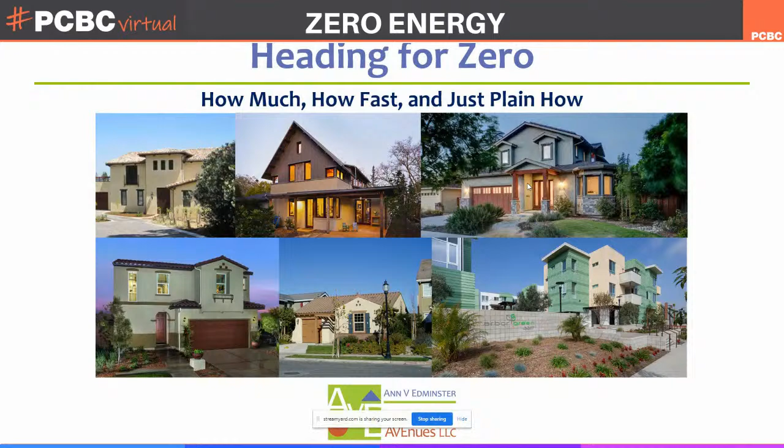Heading for zero: how much, how fast, and just plain how. We'll walk through several topics, but before getting into the core content, I want to review what exactly we're talking about with zero net, and what the heck is the E for anyway.

It's a moving target. Depending on who you're talking to, it might be zero net electricity, zero net energy, or zero net emissions. But to start with, the basic concept applies across the board: whichever we're talking about, the idea is reducing a building's energy demand through efficiency measures to the point where we can meet its annual energy needs with a renewable on-site system.

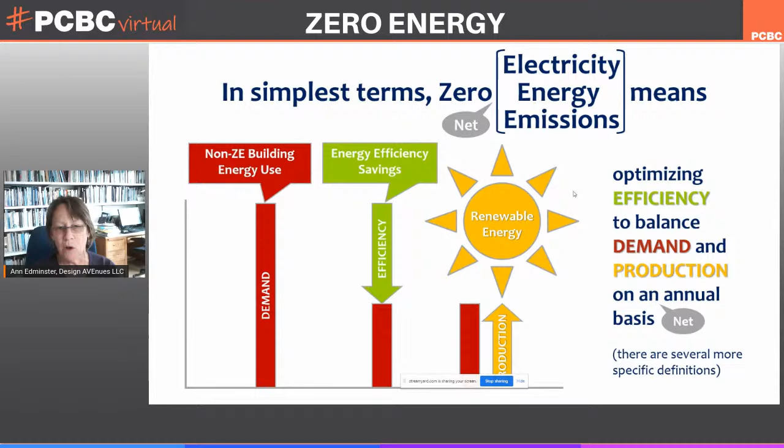We could get into the weeds, but we won't—that's a whole other hour-long talk. What I'm going to walk through this morning are some statistics about the growth in the residential zero energy market. That's my shorthand way of referring to the whole ball of wax: zero energy, emissions, and electricity.

What's driving the growth in this market sector? Some fundamentals of how folks doing zero projects are getting there, some insights into what's making these pioneering builders successful, and some trends on the horizon that are really going to shape this industry sector in the coming years.

So, moving right into the first section on growth and drivers. I've been helping run an inventory of residential zero energy projects across the US and Canada since 2015, and we've just completed our 5th inventory. What you see here is a graph of the growth over those 5 years.

The taller dark blue bars are the number of housing units, including both single family homes and multifamily units. The middle green bars are the number of buildings—so if it's a multifamily building, however many units are in that. The turquoise, smaller bars, are the number of projects. As you can infer, the projects typically have a pretty large number of units.

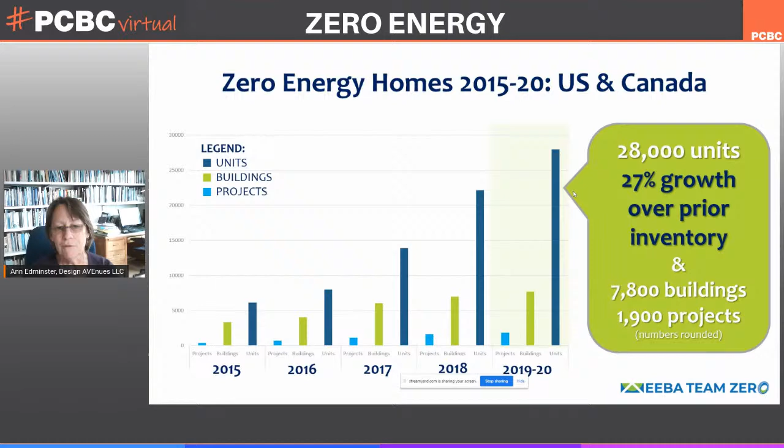So these are not just one-offs. I think that's one of the first myths about zero energy projects—that it's kind of a specialized niche thing for the privileged. That's not the case at all.

Before we get more into the nitty-gritty, I'll cover what we mean in Team Zero, which is part of EEBA these days—EEBA being the Energy and Environmental Building Alliance. We've teamed up with EEBA in the last year or so, and we're now all working with shoulders to the same wheel, which is very exciting.

At any rate, in the inventory we include all of these things we consider to be in the realm of zero: zero energy ready, and zero energy net positive, meaning producing more energy than the project consumes. We're also including projects in 4 different phases.

So not just completed projects, but those under construction, in design, or in planning—though we do exclude planned projects from most of our stats and graphs, recognizing those may or may not come to fruition at any predictable moment. We include both single family and multifamily, and both market rate and affordable.

In future inventories, we'll also be looking more at zero carbon, both embodied carbon and net operating carbon projects. Each year we look at more data points that are of interest to the community curious about how this sector is developing. So the first thing to note is our leadership profile.

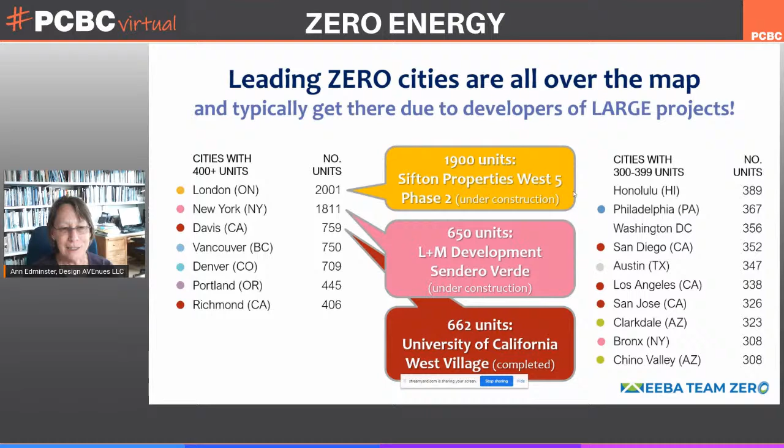So I think the real takeaway here is we really offer kudos to the developers of these projects, because it is their leadership in this industry that has the cities and the states really rise to the top in this. It's not really a contest, but it's always interesting to see who wants to know where we are in the rankings. This is starting to be a little bit of a heated contest, so that's pretty fun.

Now, another notable finding that has been consistent, but really solidifying, I would say, over the 5-year span, is that multifamily, which started out at 50% of the units, has really established a very strong dominance in the zero energy sector - going from 50 to 75% of units this year.

And what we've also learned - we don't have complete stats on this just yet, but we do know anecdotally - is that a very, very large fraction of those multifamily units are also in affordable housing, which is exciting and really just destroys another myth, which is that this is about privilege. So we've learned that this is across all parts of the socioeconomic spectrum, all different housing types and projects of all different sizes. But notably, 90%, 95% of all the units are in projects of 2 or more units.

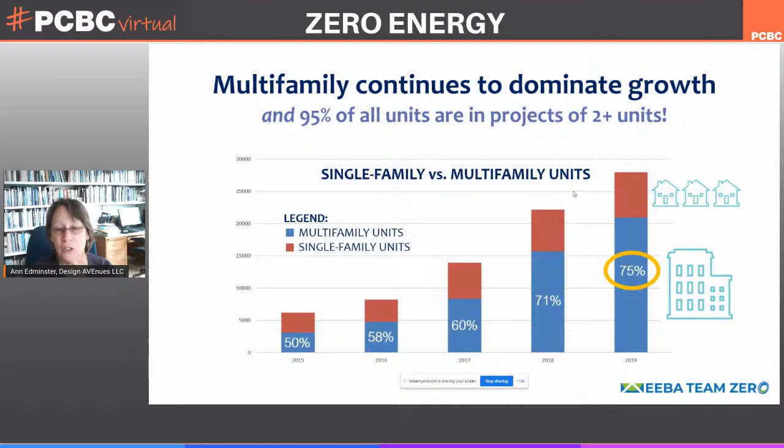So again, these are not just individual, let's say, passion projects. They are businesses that are driving this trend.

They're projects that may have some on-site solar, or in some cases wind, but it's not enough to get them to net zero energy. They may be projects that are efficient enough that with the addition of a renewable energy system on site could achieve zero net energy. Or they may even be completed and have a large enough renewable energy system - whether photovoltaics or wind are typically the two options - but they don't yet have a year of operational data where they can confirm that they are zero energy.

This is also a good opportunity to comment that all of the inventory data relies on self-reporting. So we don't go out and validate performance. We're not asking for utility bills. This is based on the honor system. But because the folks who work in this sector are largely doing it because they enjoy taking a leadership position and are really believers in how important this trend is, we have a pretty high level of confidence that we're not seeing a lot of made up information, shall we say.

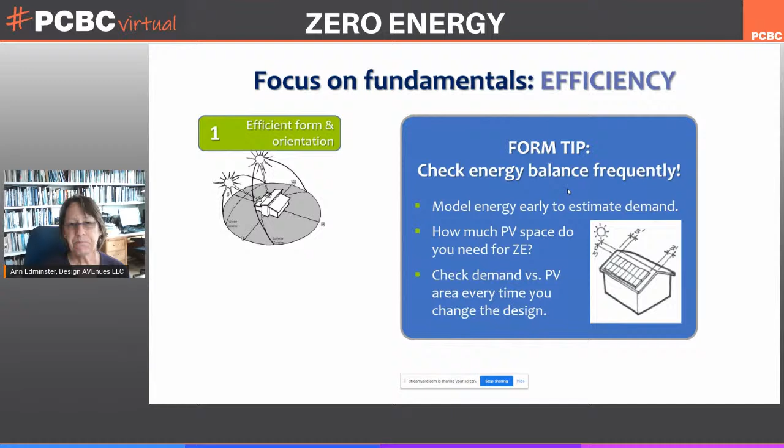So again, nothing terribly mysterious. This is just the numbers.

Our second fundamental piece here of the efficiency is the high performance enclosure, the house wrapped in a cozy neck scarf, if you will, seasonally appropriate. Another tip here: a big part of getting this done right is making sure that the construction documents, the CDs, really hold the builder team's feet to the fire in terms of the design intentions. Particularly in California, where most of our population lives in very benign climates, this doesn't sound hard, but can be more tricky than it might seem at first blush.

We haven't really perfected air sealing across the industry more broadly. So if we want a really bang up job with air sealing, we need to show and tell how that's going to be done, including a cross section showing how we have successful air sealing as we go through the transitions from different planes, wall plane to roof plane to foundation, and all of those transition details. We also need to include that information in the specs to detail the methods, the installation, and often performance testing and commissioning to ensure that all of the little 100 silver BBs that comprise the high performance enclosure are executed as intended.

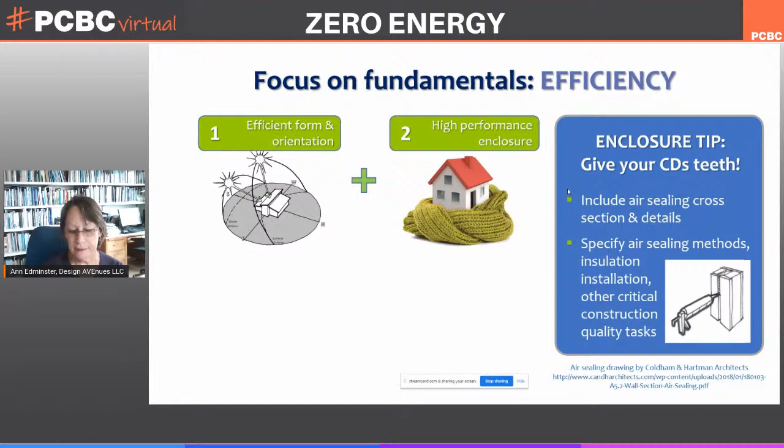Okay, our third efficiency fundamental is super efficient mechanical systems. What we're finding increasingly is that as we get to a really high performance enclosure, interestingly enough, most of our natural gas systems are too large to effectively meet the small loads that we have with these highly efficient enclosures. So we're often looking at heat pumps.

The heat pumps are not terribly mysterious or difficult, but we do find, particularly in the case of heat pump water heaters, which I'm mostly including in the mechanical systems item here for convenience, they may need a little more space than conventional water heaters.

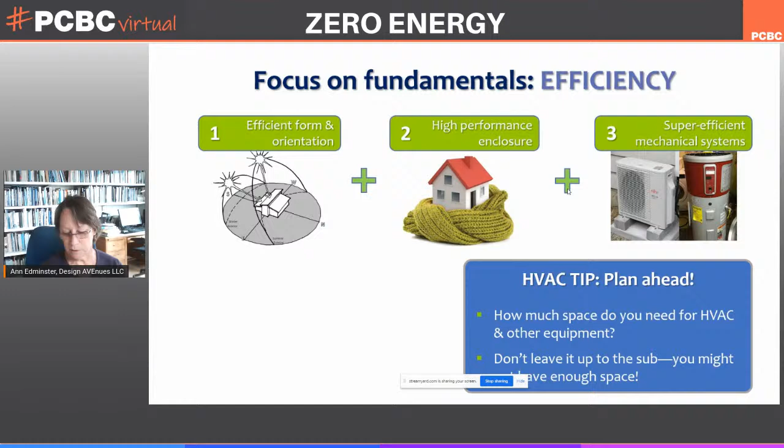It's also important that space is provided within the conditioned enclosure for mechanical system distribution systems. These are things that can easily be forgotten, and if left to the subs who are accustomed to more conventional systems, may not be executed at the level we need, that is, efficiently enough to achieve the zero energy goals. So it's important to factor in those space considerations.

Our fourth efficiency fundamental is what I'm referring to as best-in-class electric devices. My tip here is, for a long time, Energy Star was really seen as the best in class. Well, even EPA a couple of years ago sort of acknowledged that Energy Star was no longer best in class. They did so by creating a new category called Energy Star Most Efficient.

So EPA has those equipment listings, as does CEE1.org, that's the Consortium for Energy Efficiency, and Enervee has a marketplace, which in many cases the major utilities have branded under their own umbrella. I know PG&E has this, and I believe Southern California Edison does as well. So be sure and look in the utility websites for their equipment marketplace to find these efficient models.

Okay, time for another sip here.

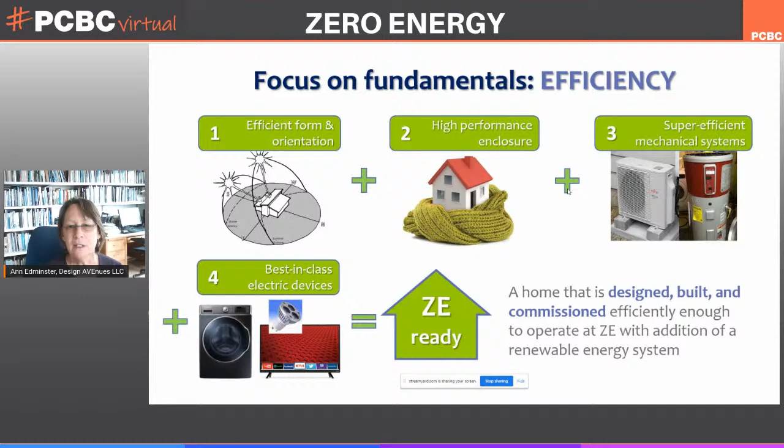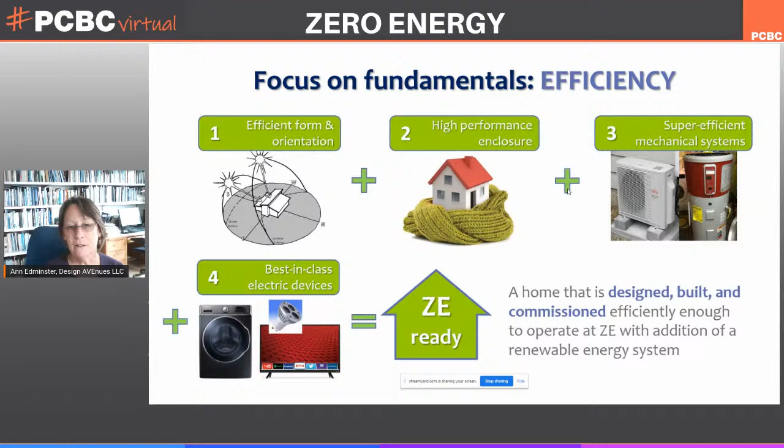So these four categories of efficiency combined get you to a home that is zero energy ready. That is, if it's designed with this efficiency, built to meet that efficiency level, and commissioned to ensure the operation of the home in such a way that once a renewable energy system is added, it could achieve a zero net operating energy with that renewable energy system. And once we add the system, voila, we're at a zero energy home.

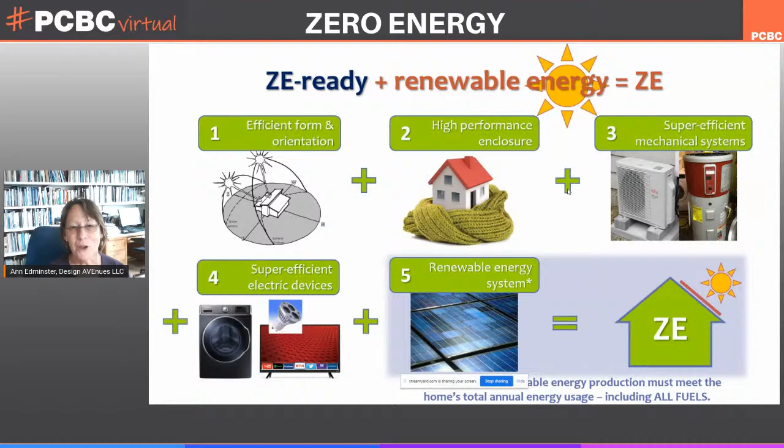This is assuming, of course, my little footnote at the bottom, we're accounting for all fuels when we say zero net energy. If we're just zeroing out electricity, that's another E, that's zero net electricity. And if it is all clean renewable energy from the grid as well as on site, then you might be achieving zero net emissions. So here we are with our multiple definitions again.

Okay, so whichever one it is you have achieved, let's learn a little bit from some of the builders who have been real pioneers in this field.

One of these, a personal hero of mine, is Gene Myers, who's the founder and CEO of Thrive Home Builders in the Metro Denver area. I've heard so many wonderful stories from Gene about how he has achieved what he has. He's been in the energy efficiency game for several decades, and he's been an early adopter each time a new notion of how to build a better house comes along. This is one of Gene's many pearls of wisdom, but I love this.

He says we have to understand what our buyers want, and what matters most to them is their family and keeping their family healthy and providing for them the best possible life. So he likes this message they use in some of their advertising, a little baby in a high chair with the mom feeding her, and the caption saying, 'The air she breathes is just as important as the food she eats.' So he's not saying come buy our zero energy home. What he's saying is we're building a healthy home, and it also happens to be a zero net energy home. But what he understands is in his market, this is the most important value.

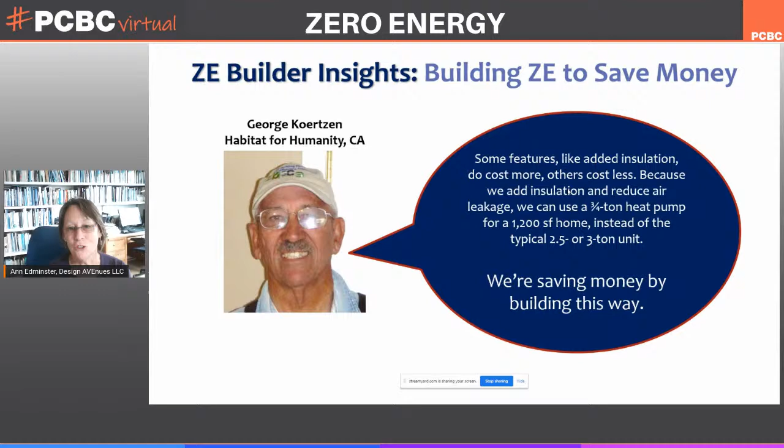Now George Koertzen, who's another hero of mine, he's in the Central Valley here in California. I've had the pleasure of working with George for several years on his Habitat for Humanity project. Habitat's absolute bedrock is building the most cost-effective possible homes for low-income buyers. So what George is saying is, look, we've invested more in some features, and that has enabled us to reduce costs on other aspects of the home, and we save money by building this way. I'll cite a project where I was involved on the research team, where George tracked the additions and subtractions and found that through these trade-offs—and George is an absolute genius at finding ways of shaving costs—they actually saved $3,000 on their first zero energy home prototype compared to their pre-zero energy model.

That's quite an achievement, especially in the affordable housing realm. Kudos to George. Then Brandon DeYoung, who's also in the California Central Valley, a bit south in the Fresno area—George is in Stockton—Brandon's really looking forward at going to all electric. This quote is from a couple of years ago: 'In our Envision homes, the only gas will be for cooking. We have an induction option, some are upgrading to that. And most importantly, it's just a matter of time and consumer education to get to all electric homes.' This is a theme you'll hear me say a little more about towards the end of the presentation.

So now I'm going to talk a little bit about what we're seeing with some of these emerging trends.

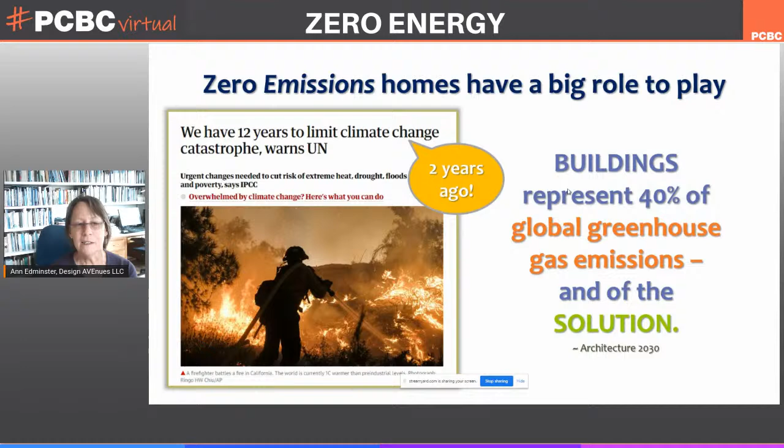First of all, I think no one, especially those of us in California and other parts of the wildfire-prone West, can fail to have noticed the accelerating concerns around climate change and the role it plays in the much worsening wildfire situation here in the West. The resounding message is that we have a very narrow time window to address this, but the exciting part for those of us in the building industry is we get to be part of the solution. Buildings represent 40% of our global greenhouse gas emissions, but they can also represent 40% of the solution. So as we replace the lost housing from the fires of the past few years and continue to build for our growing population that needs homes, particularly affordable housing, we can actually produce housing that isn't worsening that situation. It's very important to recognize that it's not all bleak—we have a very hopeful opportunity in front of us.

And as I mentioned when speaking about Brandon DeYoung and the forward-thinking position that DeYoung Builders is taking, there is definitely a pretty amazing wave. I heard from a colleague recently who happened to be at Mavericks, for those who follow surfing, at a big wave day where folks from all over the world came and surfed these incredible 50, 60-foot swells. So we're approaching a swell like that with the decarbonization move.

As of this month, we've got 40 local governments just in California who have either incentivized or created mandates for all-electric new residential construction. Those jurisdictions now represent over 4 million people, which is more than 10% of California's population. And we are seeing more and more of these adoptions in local jurisdictions pretty much every week. So this is a very big thing that's happening.

I know that for many folks it's a little bit alarming and controversial. Nevertheless, whatever your feelings are about it, it is clear that this is the wave of the future. And so it's best, in my view, to be on the positive side of it and understand the really terrific outcomes that come from it.

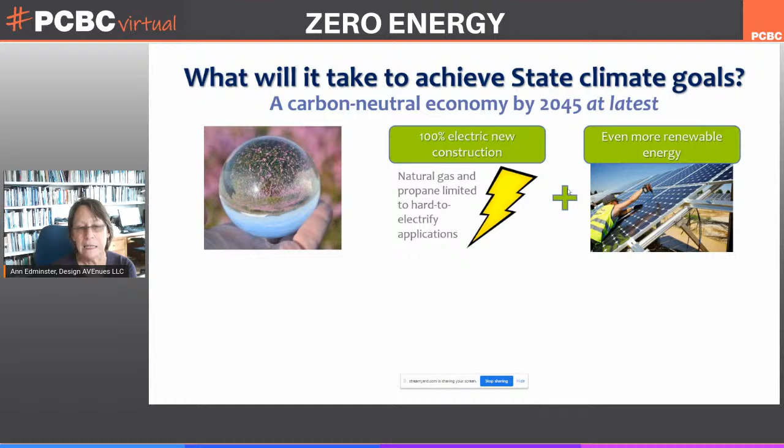So we're going to see more renewable energy. Even though the current Title 24 Energy Code actually puts sort of a lid on the amount of renewable energy on new homes, that is mostly driven by the desire to have a better match between demand and supply, so that we don't end up with a big oversupply of renewable energy at times of day when we don't have anywhere to put it. So when the sun is high in the sky and we have a lot of renewable energy production from photovoltaics across the state, right now we're not always able to use it all.

However, the other thing that's happening is we're going to see more on-site energy storage, and of course the state and beyond - there are also very significant efforts to increase utility scale energy storage. So we're going to start to see a bit better balance between those two, including more and more batteries on homes.

And I imagine we may even have some listeners today who are starting to look at energy storage on site themselves, not least of all because of the public safety power shutoffs many of us have experienced. And I know with people both working and schooling at home, maintaining electricity supply on their home premises is just tremendously important. So this has really trended upwards - I've spoken with some of the photovoltaic vendors, and they have said that a large fraction of their new contracts to install solar are including on-site battery storage. So that is already happening.